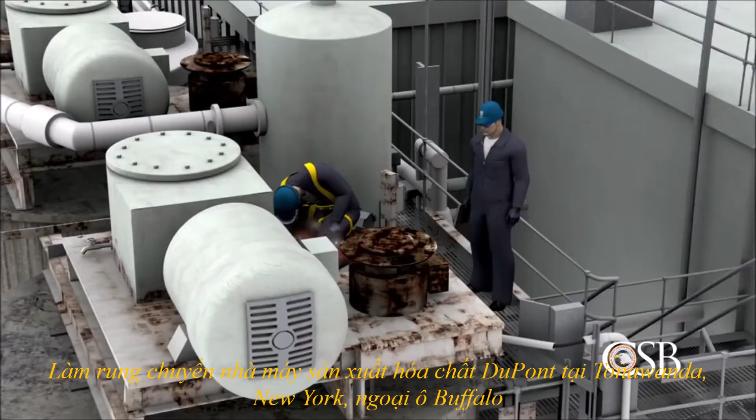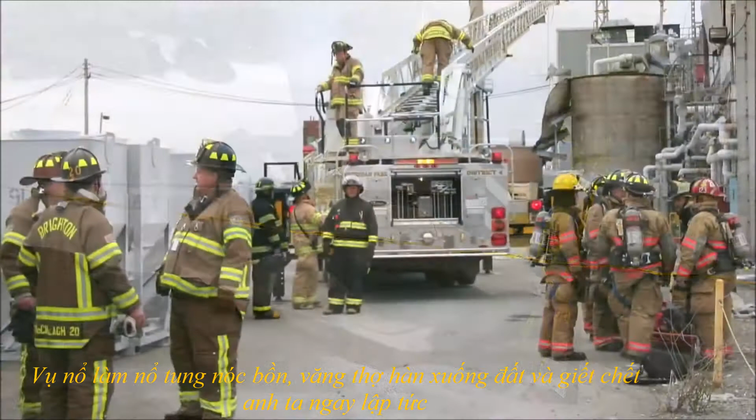On November 9, 2010, a powerful explosion shook the DuPont chemical manufacturing plant in Tonawanda, New York, a suburb of Buffalo. A contract welder was performing maintenance work on a tank that, unknown to him, contained flammable gas. The explosion blew the top off the tank, throwing the welder to the ground and killing him instantly. A second contract worker was burned.

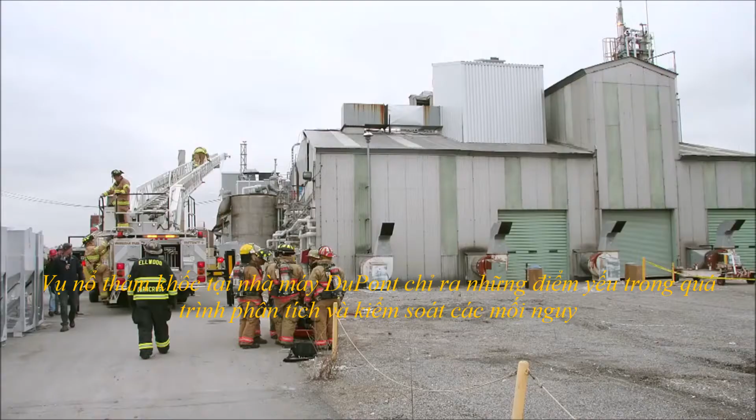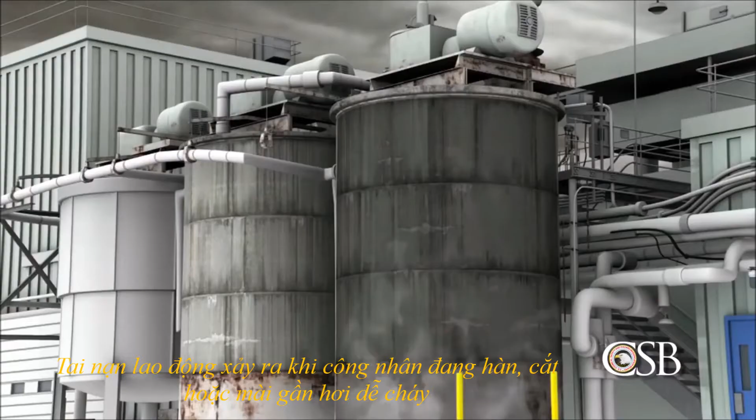The tragic explosion at the DuPont facility exposed weaknesses in how process hazards were analyzed and controlled. The result was the death of a welder in a preventable hot work accident. Hot work accidents occur when workers are welding, cutting, or grinding near flammable vapor, and were the focus of a 2010 CSB safety bulletin. Deficiencies in the safety management of hot work were among the causes of the tragedy at DuPont.

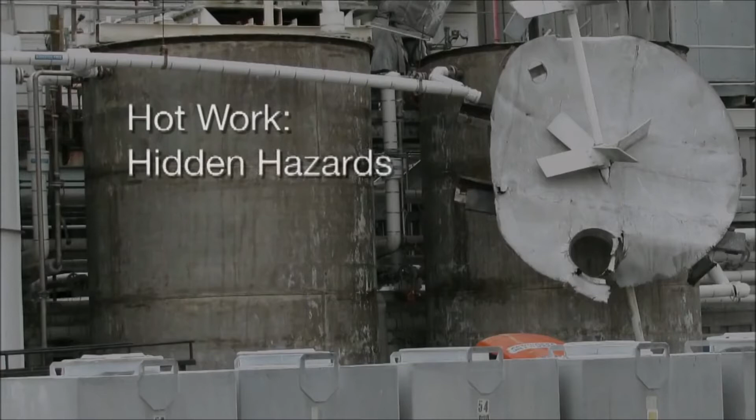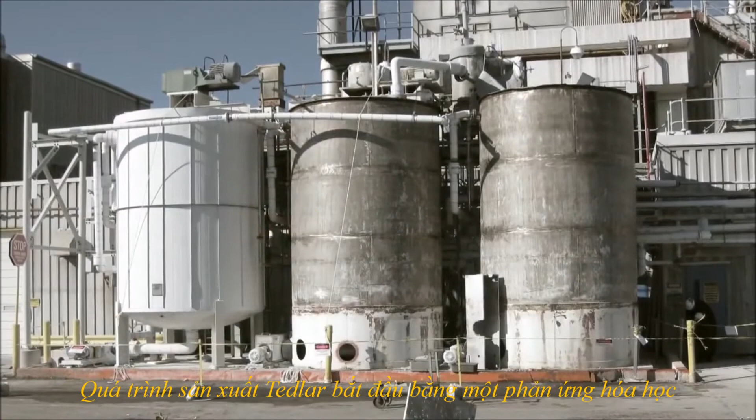DuPont's Tonawanda facility manufactures a polymer known as Tedlar, used in solar panels, and Corian for use in countertops. The process of producing Tedlar began with a chemical reaction to convert flammable vinyl fluoride gas into a slurry of polyvinyl fluoride polymer, or PVF, in water.

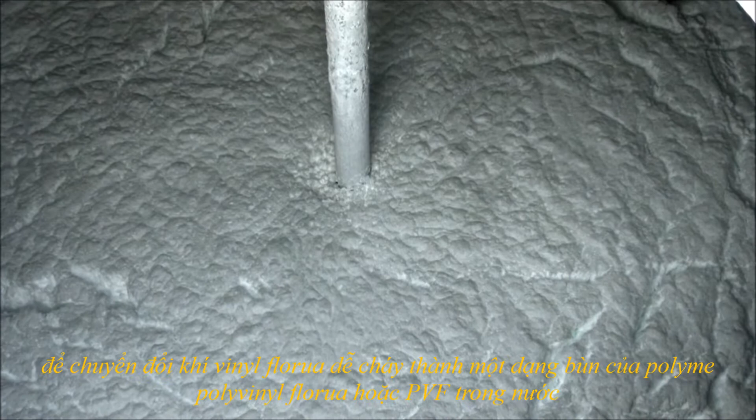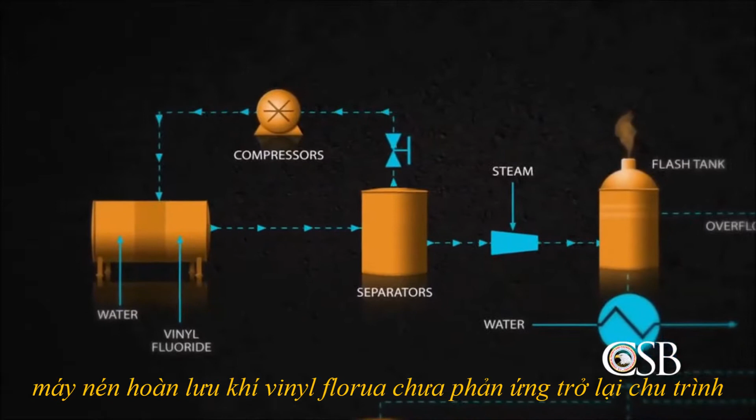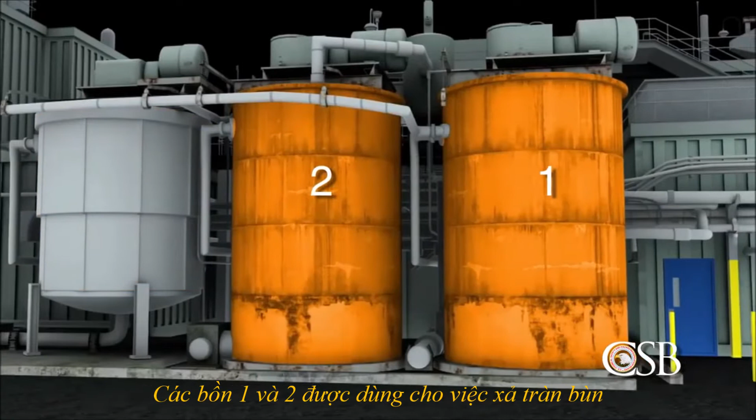The PVF slurry then passed through separators. Compressors recycled unreacted vinyl fluoride gas into the process, while a small flash tank released residual vinyl fluoride into the atmosphere. Finally, the slurry was transferred to one of 3 insulated holding tanks, usually tank number 3. Tanks 1 and 2 were reserved for slurry overflow. Tank 1 normally remained empty.

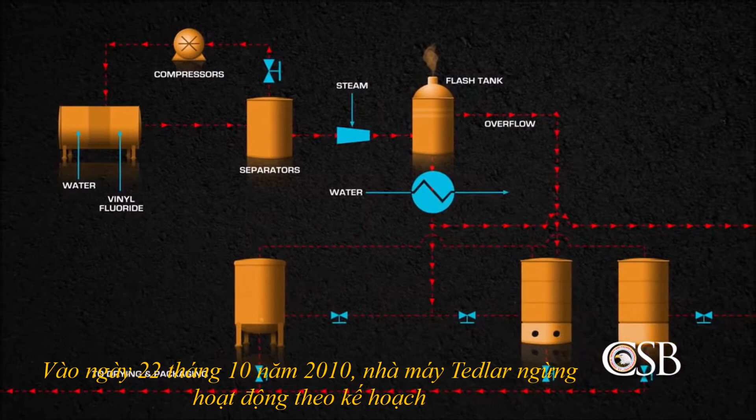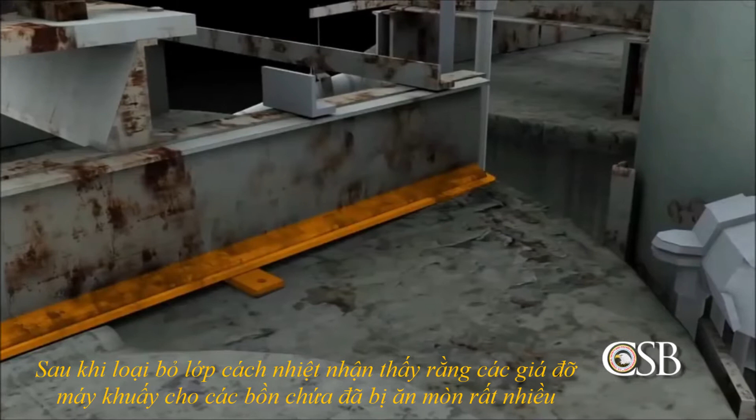On October 22, 2010, the Tedlar process underwent a planned shutdown, during which workers removed the asbestos insulation on tanks 1 and 2. Removing the insulation revealed that the agitator supports for the tanks were heavily corroded. DuPont directed contractors to repair the supports, which would involve welding and grinding on tanks 1 and 2.

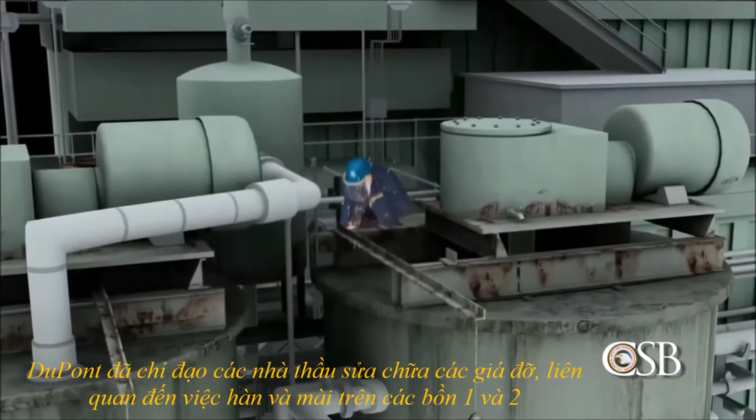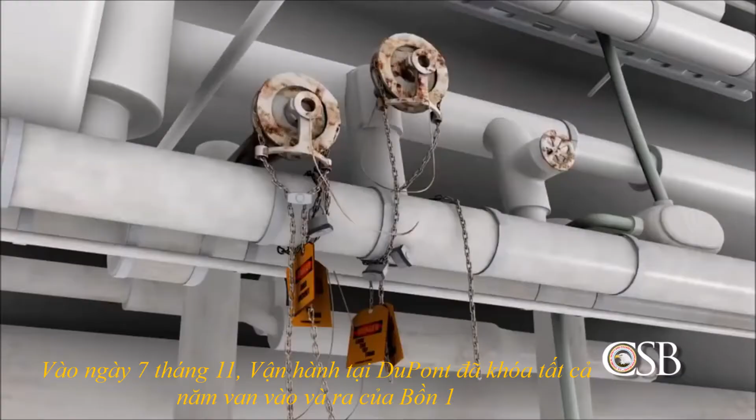The hot work on tank 2 occurred during the shutdown without incident, but the repairs on tank 1 were delayed while parts were ordered. DuPont personnel determined that it would be safe to perform hot work on tank 1 after the restart. On November 7th, DuPont operators locked all 5 valves leading to and from tank 1 in the closed position in order to stop potential slurry flow.

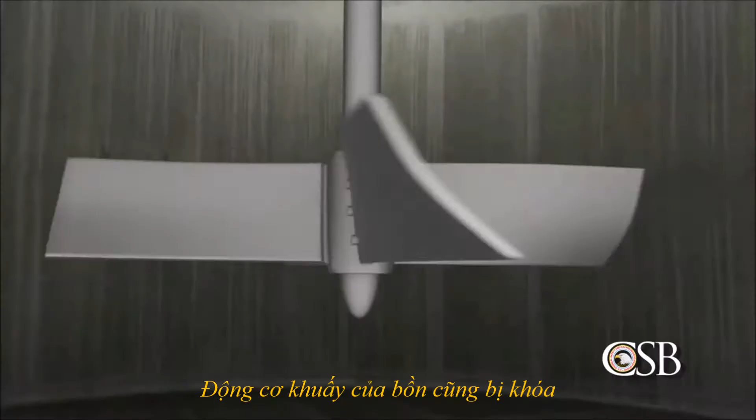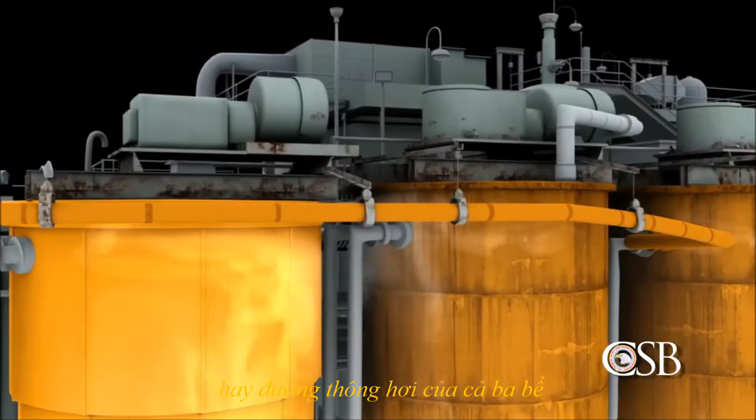The tank's agitator motor was also locked out. However, DuPont personnel did not block the flow of gas inside the overhead piping, or overflow line, that connected the vapor space of all 3 tanks. They mistakenly believed that flammable vinyl fluoride gas could not reach any of the slurry tanks.

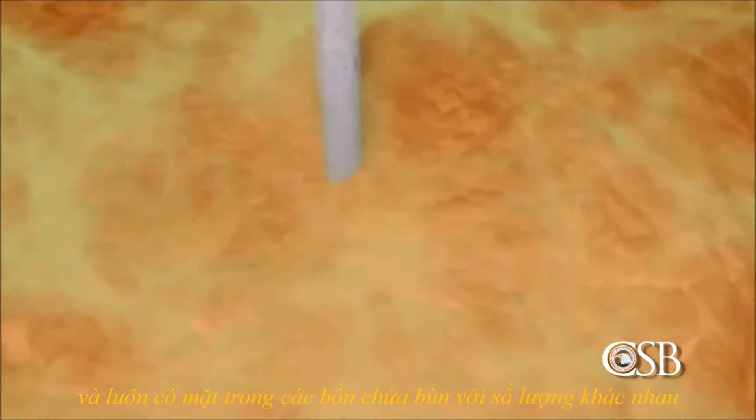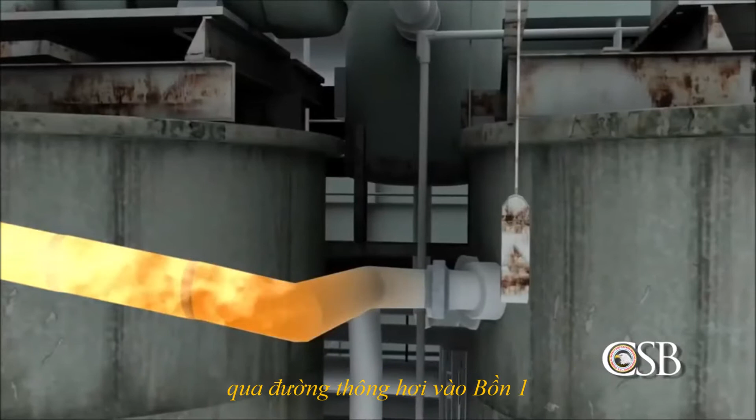But the CSB investigation found that even in normal operations, vinyl fluoride was not completely removed from the slurry and was always present in the slurry tanks in varying amounts. When the process restarted on November 6th, the flammable gas was able to travel from tanks 2 and 3 through the open overflow line into tank 1.

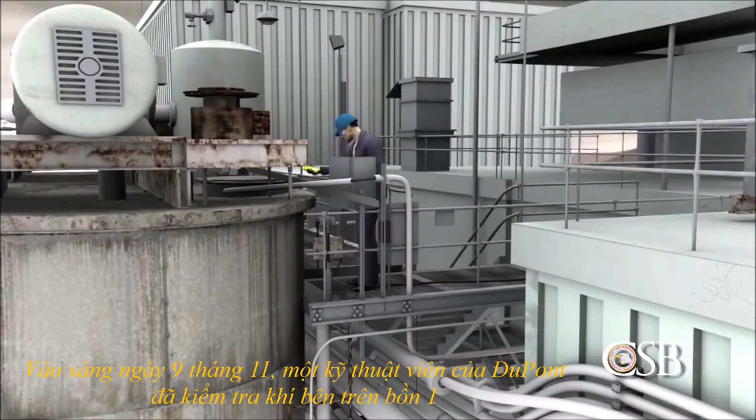On the morning of November 9th, a DuPont technician tested the atmosphere above tank 1, where welding would later take place. There were also 2 continuous air monitors in the vicinity. No flammable gas was detected, and the hot work was cleared to begin. But no testing was done to measure or monitor the atmosphere inside the tanks, where, unknown to the contractors, the flammable gas was at dangerous levels.

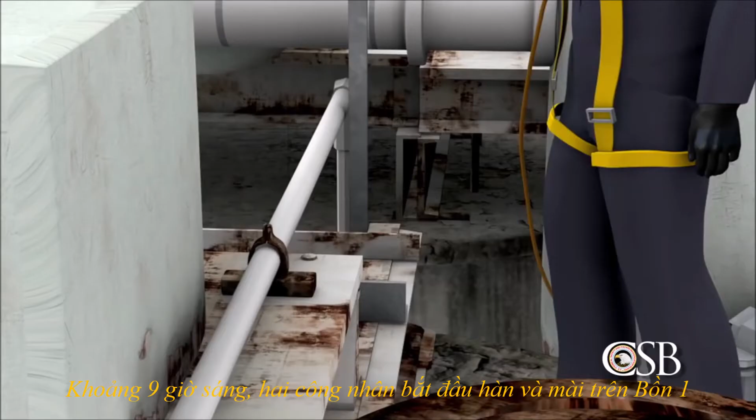Around 9 a.m., 2 contract workers began welding and grinding on tank 1. The welder connected his safety harness to the tank's agitator support and worked on top of the tank as the foreman looked on from the nearby catwalk.

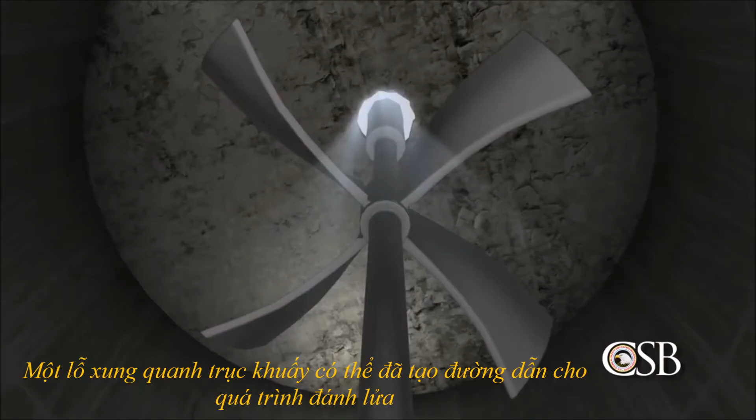At approximately 11 a.m., the welder was repairing corroded portions of the agitator support beams directly above the flammable gas. A hole around the agitator shaft may have provided a pathway for ignition. Welding sparks could fall into the tank, even as flammable gas might drift upward toward the sparks. The ignition of the vinyl fluoride caused a powerful explosion.

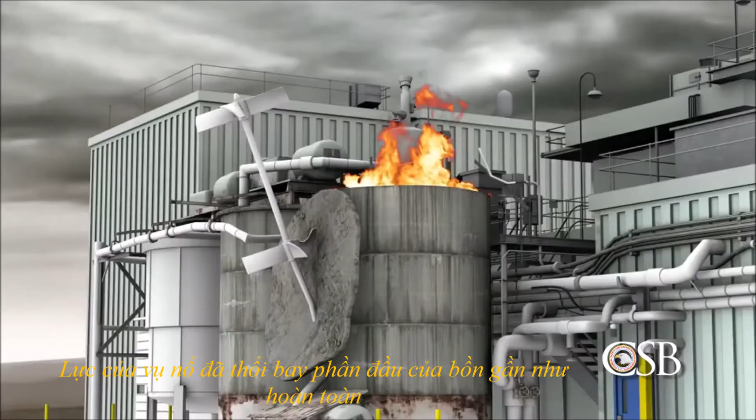The force of the blast blew the top of the tank almost completely off. A flash fire erupted that consumed the flammable gas and quickly burned out. The welder was thrown to the ground, killed instantly from blunt force trauma.

The foreman's face and arms were burned. Mark Wingard was a member of the CSB team that investigated the accident at DuPont.

Had DuPont technicians tested Tank 1 for a flammable atmosphere, they would have known that any hot work presented a serious explosion hazard. But plant engineers did not realize that significant amounts of flammable gas could be present in the slurry tanks, and the testing was never done.

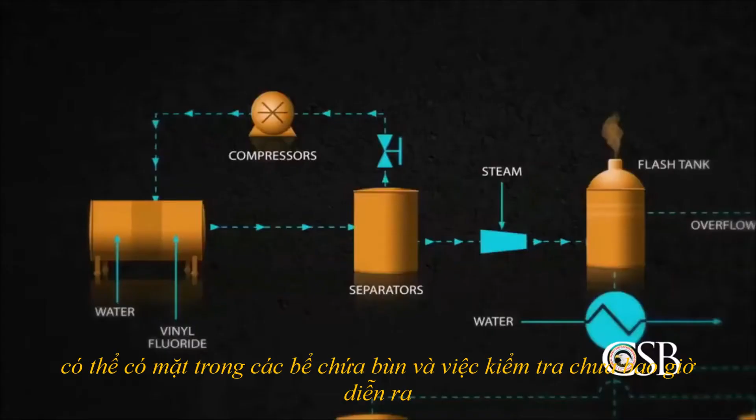DuPont regarded most of the Tedlar production process as covered under the OSHA standard for Process Safety Management, or PSM, and therefore subject to stricter operating and maintenance requirements. But DuPont personnel did not include the slurry tanks in the facility's PSM program.

In a 2009 process hazard analysis, DuPont erroneously concluded that flammable vinyl fluoride gas could never reach the tanks in dangerous quantities. We found that the contractors did obtain hot work permits for welding on Tank 1, but those permits were authorized by DuPont employees who were unfamiliar with the specific hazards of the process, and the permits did not require testing the atmosphere inside the tanks.

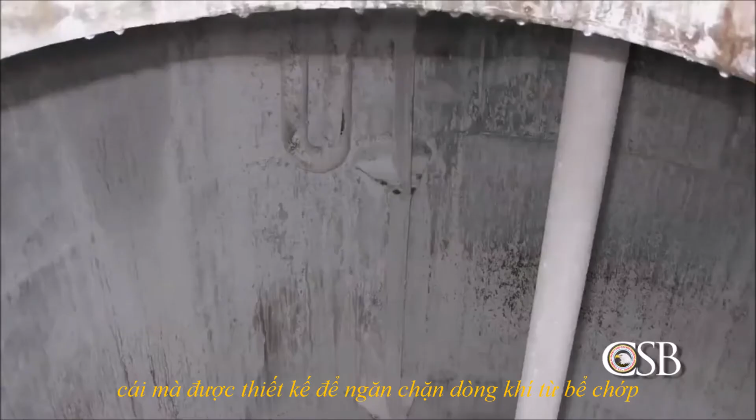Two additional factors may have contributed to the tragedy. Prior to the explosion, DuPont personnel had discovered that slurry tank number 2 had a hole in a liquid trap, which was designed to prevent the flow of gas from the flash tank. Without a liquid seal in the trap, there was an additional pathway for vinyl fluoride gas to flow into the tanks.

However, this hazard went unrecognized, and DuPont engineers concluded that it would be safe to return the tank to service. No formal management of change review was conducted.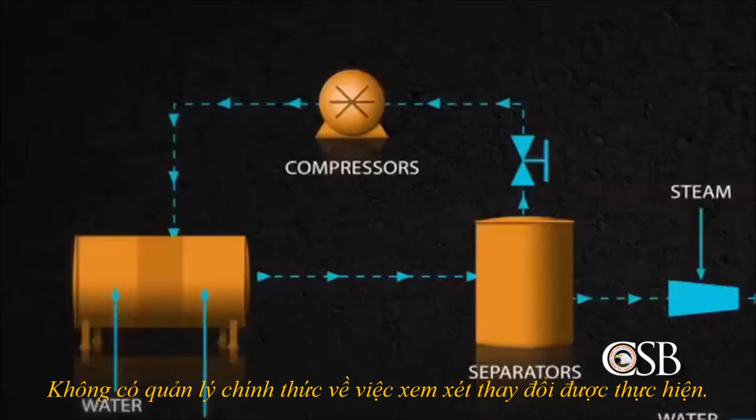Further adding to the danger, on November 8th, there was a malfunction in a compressor used to strip vinyl fluoride gas from the PVF slurry. As a result, the slurry contained more than the normal amount of vinyl fluoride. Once again, DuPont personnel did not formally analyze the safety impact of continuing to operate with a malfunctioning compressor.

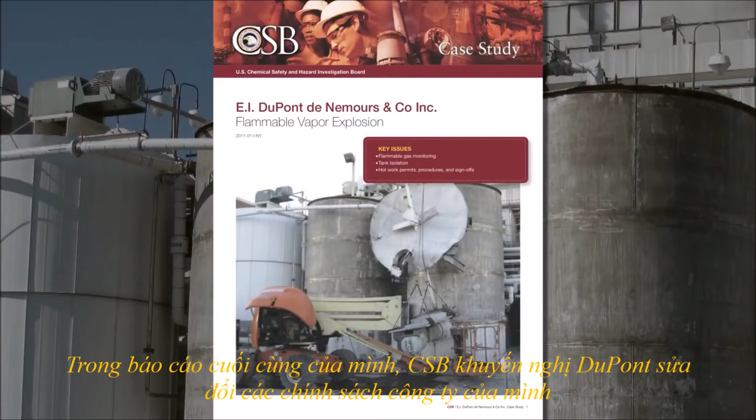In its final report, the CSB recommended that DuPont revise its corporate policies to require atmospheric monitoring inside tanks before and during any hot work. And the board recommended that DuPont require all process piping, including vent lines on tanks, to be positively isolated before authorizing any hot work.

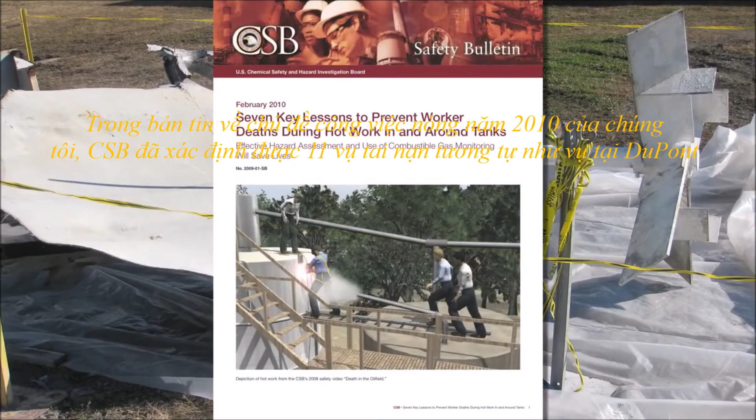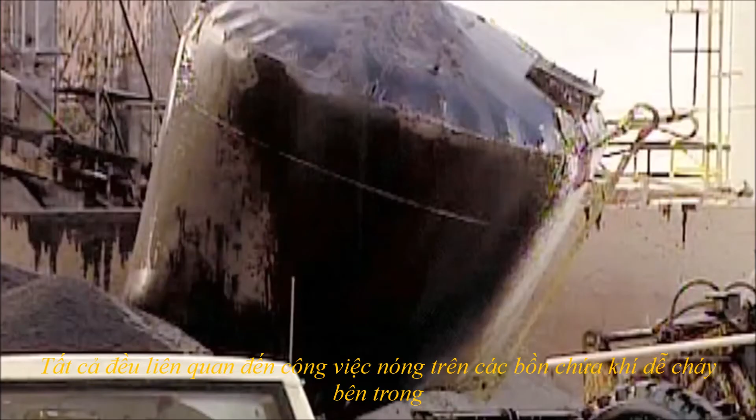In our 2010 Hot Work Bulletin, the CSB identified 11 accidents similar to the one at DuPont. All involved hot work on tanks that ignited flammable gas inside. In all cases, the CSB found that there was not an adequate system in place for monitoring the atmosphere for flammable vapor where hot work was to occur.

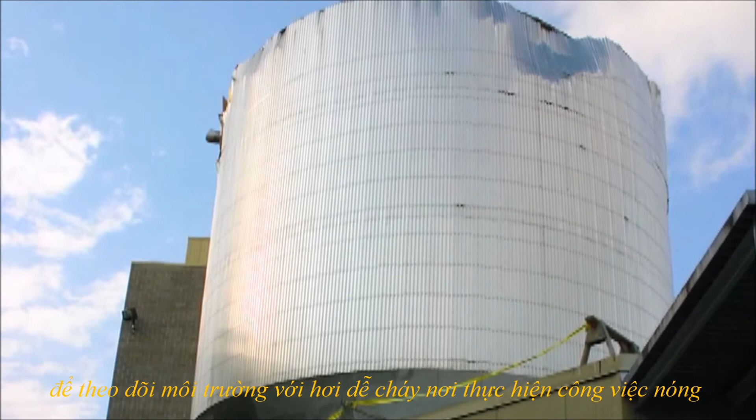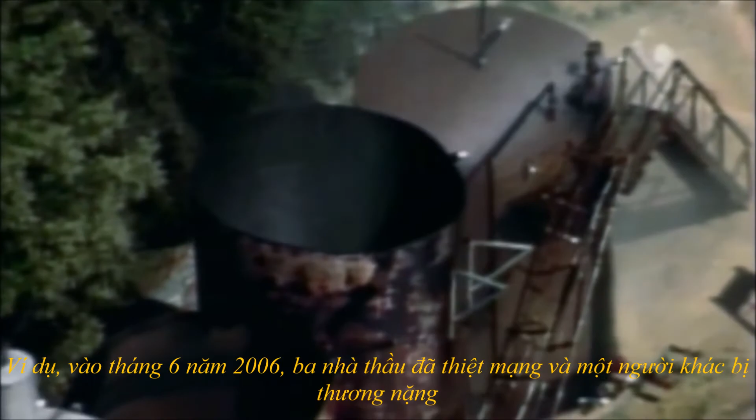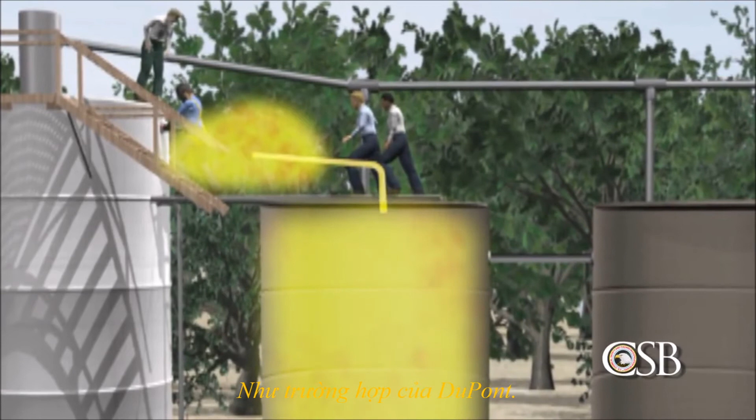For example, in June 2006, 3 contractors were killed and another seriously injured in an explosion at the Partridge-Raleigh oil field in Raleigh, Mississippi. The contractors were welding on one of 4 storage tanks when welding sparks ignited flammable vapor flowing from an adjacent tank. As was the case at DuPont, no monitoring was performed to test for flammable gas inside the tank, and piping to the adjacent tank was not isolated.

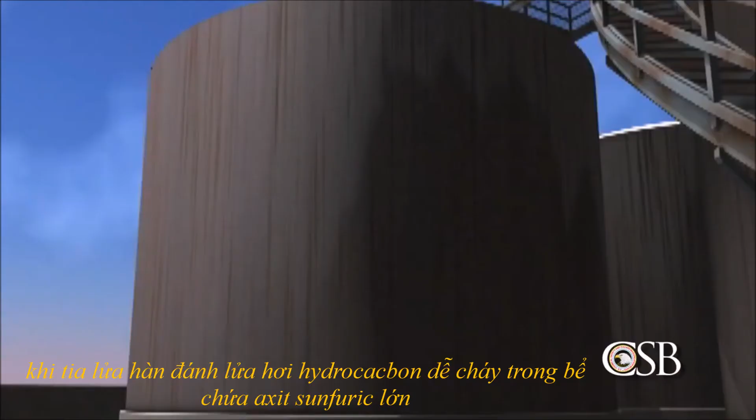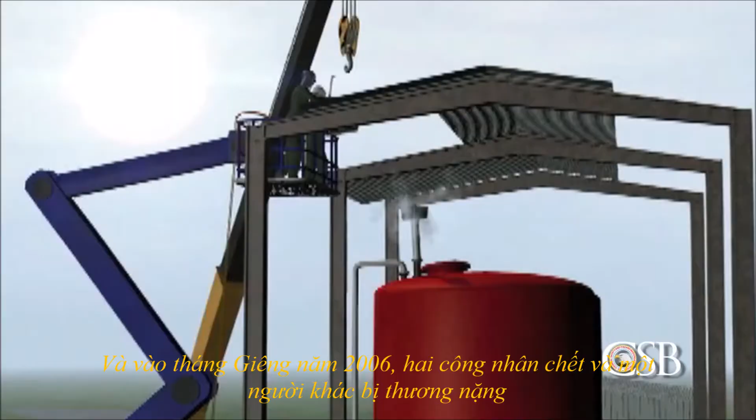In July 2001, an explosion killed 1 contract worker and injured 8 others when welding sparks ignited flammable hydrocarbon vapors in a large sulfuric acid storage tank at Motiva's Delaware City refinery. And in January 2006, 2 workers died and another was seriously injured in an explosion at a municipal wastewater plant in Florida when hot work ignited vapor inside a storage tank of highly flammable methanol.

In all of these cases, combustible gas monitoring either was inadequate or wasn't performed at all. In its 2010 safety bulletin, the CSB said companies can prevent hot work accidents by analyzing the hazards, enforcing rigorous training and permitting procedures, constantly monitoring the atmosphere for flammables, and avoiding hot work in favor of non-spark producing methods whenever possible.

Hot work is often seen as a routine activity, but it can prove deadly if fire and explosion hazards are overlooked. Thank you for watching this CSB safety video.